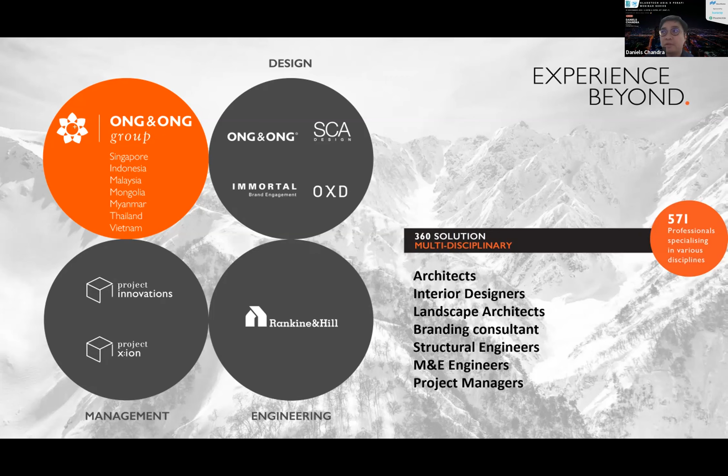I would like to touch base a little bit on the approach, which is building information modeling. I hope most of you are familiar with BIM before. In the Singapore context, for example, we started back in 2010 with BIM. The Singapore government basically pushed consultants to embrace BIM in their design and also for authority submissions and building approvals.

So BIM essentially is basically we model the thing first virtually, and we produce the drawings that come from the model. It's not the other way around where you create plan, floor sections, elevations, and then get the models after that. You actually start with the model first, and drawings come later.

So the use case of BIM is pretty much across the board from start to finish of the project, starting from design development, conceptual design, including authority submission for the Singapore context, 3D coordinations, and all the way until FM and some automations. This is what we have for BIM.

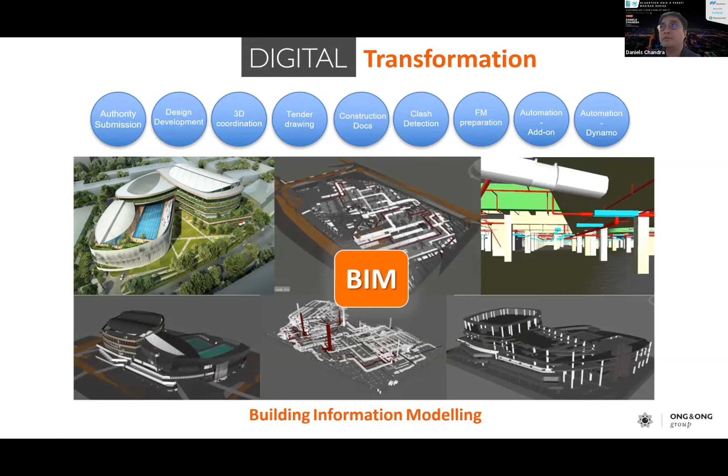Now, Singapore also embraced what we call virtual design and construction, VDC. That was back in 2015, which is basically another enhanced process after BIM. So we have BIM, we have ICE, integrated concurrent engineering, where everybody gets together to do coordination using the BIM model, and then processes of production and management, things such as DFMA, design for manufacturing and assembly.

So all of these are part and parcel to create a virtual mock-up of the actual thing before it's actually built. So what we call is, we build it twice. Conceptually, we build it in the computer first, then after that, you build it on site.

Just to give you an idea, this is one of our projects using the VDC process, where we built the whole entire thing virtually from design all the way to the construction process, meaning site logistics, how these things are actually constructed, from the building structure, architecture, M&E, as well as the facade.

So step one is to build the thing virtually using BIM technology. Second is to build the thing on site. So make sure everything has no issues, no clashes, no problems, then you actually construct it on site. That's the holistic approach of VDC, which is pretty much the approach of digital twin, where you have the physical and the virtual together.

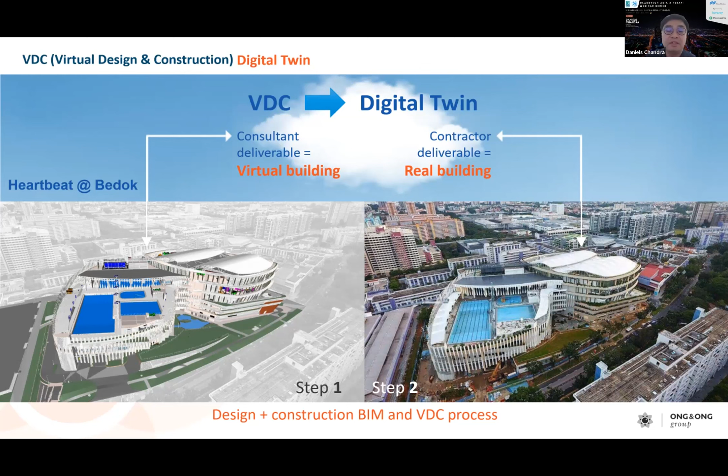Now, IDD, this is one of the latest approaches of digitalization from BCA Singapore. The earlier approach started back in 2017. IDD stands for integrated digital delivery. There are 4 pillars: first is digital design, second is digital fabrication, digital construction, and also digital asset delivery and management, which is pretty much FM, or facility management.

For the purpose of today's discussion, IDD is quite a lot to discuss if you go through everything. So for today, especially relating to the facade models, processes and workflows to create the facade design, it's pretty much digital design, which is on the left-hand side here. It's about how we optimize the design for the facade, how to do simulations and analysis on the building itself, and how to integrate the whole process together with BIM and VDC.

I'm going to touch base also about the cloud, because especially nowadays with the needs of collaboration, how we actually move from traditional method to the digital method. Cloud-based is very essential, especially with the implementation of common data environment.

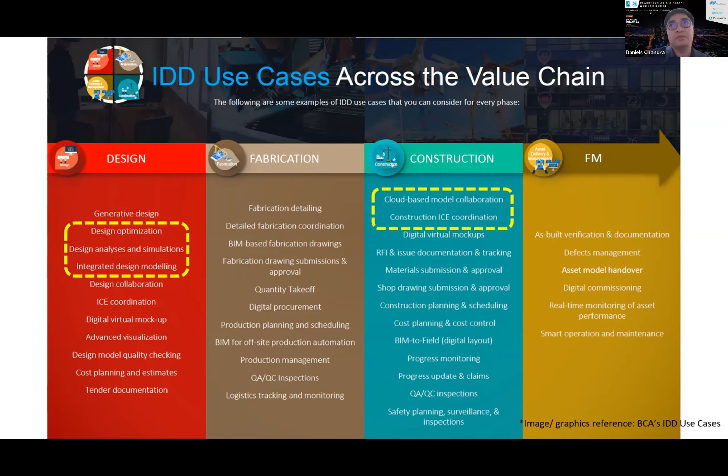So in our context, for the digital transformation pillar, we came up with a strategy we call Digital Beyond. It's basically a three-pronged approach: first is the digital workplace, second is the digital workforce, and last is the digital workflow.

We set up our digital workplace as a base to enable the other two. Our staff and manpower need to be trained and need to change their mindset to embrace the holistic nature of digital transformation. And after that, the workflow itself needs to embrace the whole three-prong approach and be delivered in a digital way rather than the manual way.

Okay, so I'm going to start with the digital workplace, which is the difference between standalone and collaborative. We're moving away from standalone to collaborative. When we started BIM in 2010, 2011, and 2012, back then it was kind of standalone - we were doing our own architecture models, consultants doing their own structure models, and our M&E design partners also doing it on their own. But we need to move into something more collaborative now with the whole effort of IDDs and VDCs and so on. Collaborative is the way to go.

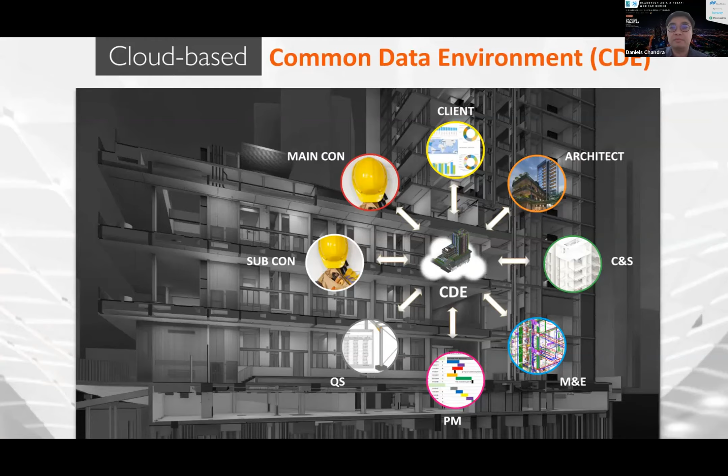This is an example of a project we did using the common data environment, which successfully won an award. This is one of the healthcare projects, and another one is a private residential project, one of the first 12 IDD projects in Singapore.

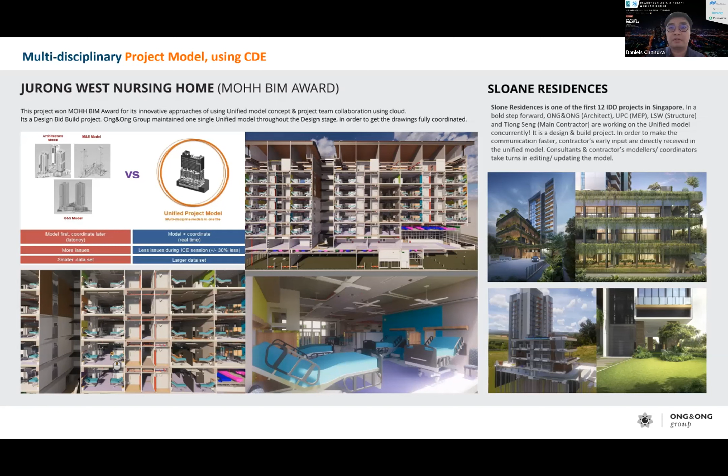Speaking on the workflow, the reason CDE is important is because it's the platform itself. In terms of creating the BIM model, conducting VDC, and integrating it into the IDD workflow, that becomes one of the enablers. For example, we can enable a multidisciplinary BIM model.

So every discipline, every consultant actually works in the same file, the same model. Essentially it's one single file. So with real-time authoring, we need this kind of infrastructure to be enabled first.

Digital design with computational BIM is something I'm going to talk more about after this, related to facade treatments of the building and how to generate facade options from this tool. This is one of our add-on tools that we developed in-house for BIMomatic, another way to automate the process to ensure the IDD process of automation is implemented more efficiently.

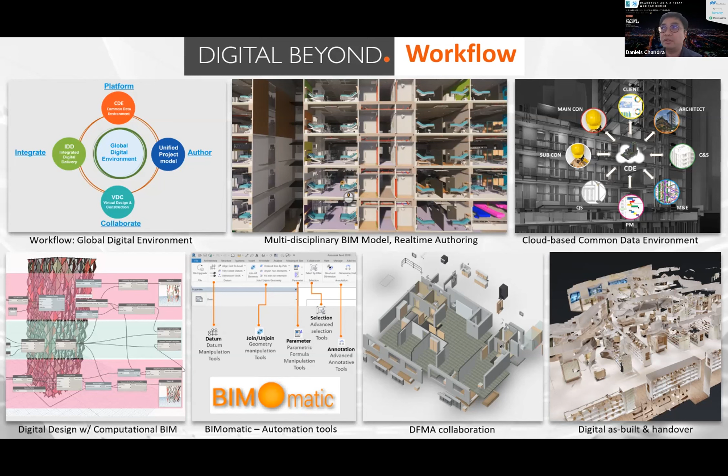DFMA is the next level of digital fabrication in IDD, so it's one of the key things we're deploying in the office, as well as for the FM handover. When the project is finished, we scan the buildings using a LiDAR scanner, then hand over the model together with all the sets of FM data.

How much time do I have? Okay, so the generative design, digital design use cases for IDD, I'm going to touch on this—pretty much about parametric modeling, computational BIM, and generative design.

Just imagine we have this kind of square cube. Parametric modeling, computational BIM, and generative design is one of the methods we normally use to do facade treatment for the building, which is part of the IDD use case listed in BCA's IDD.

Imagine a box like this. What it does is we manipulate the box with different heights, different lengths, different configurations of width and height, and so on, then arrange them accordingly with certain patterns. So this is how we manipulate the models and create options for the facade, for the building skin.

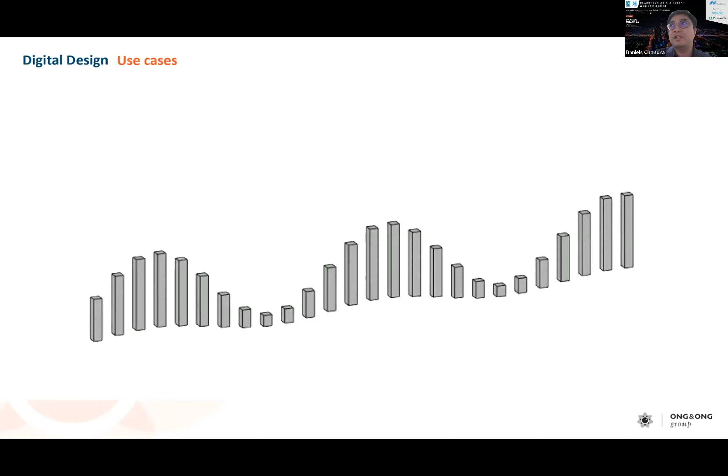Once we manipulate it with a script like this, the computer can offer us a series of options. These are examples of options being offered—there are so many pages of options displayed by the computer. As designers or architects, this tool is quite helpful.

Essentially, these are the ideas of how parametric modeling, generative design, and computational BIM actually work. Now I'm going to show you some case studies from the project itself.

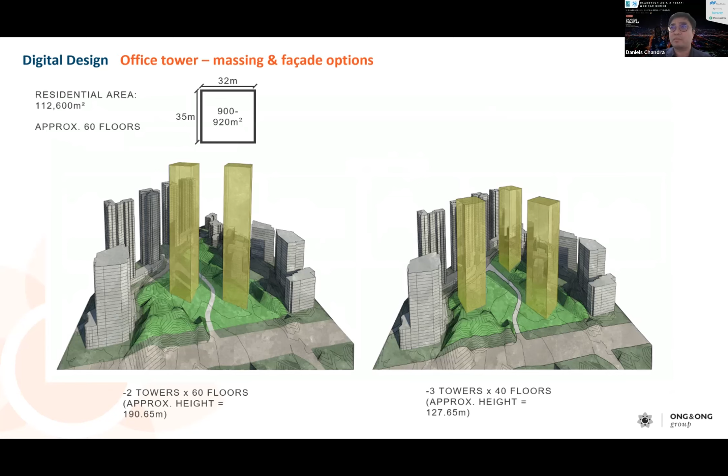This is an example of a master planning project with two towers, I think it's residential. It's a typical so-called building massing. We have typical towers like this, with the setup including ventilation gaps, balconies, and terraces, and so on.

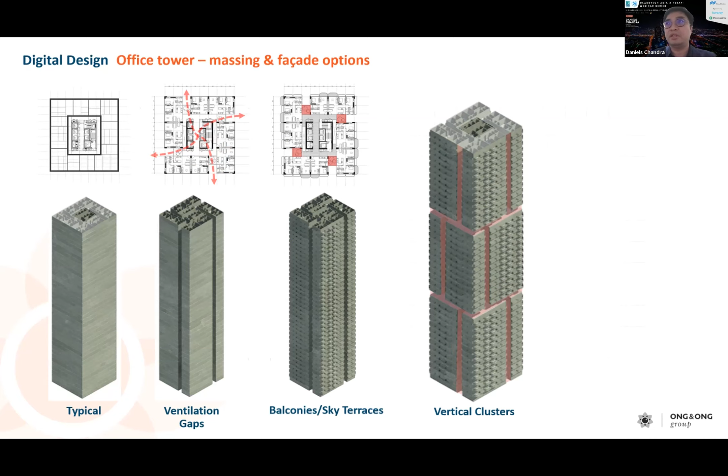After that, we play around with vertical clusters. These vertical clusters allow us to set different permutations of the massing itself using the script. This is an example of how it works. We're using Dynamo for this, and the model is done in BIM using Revit software.

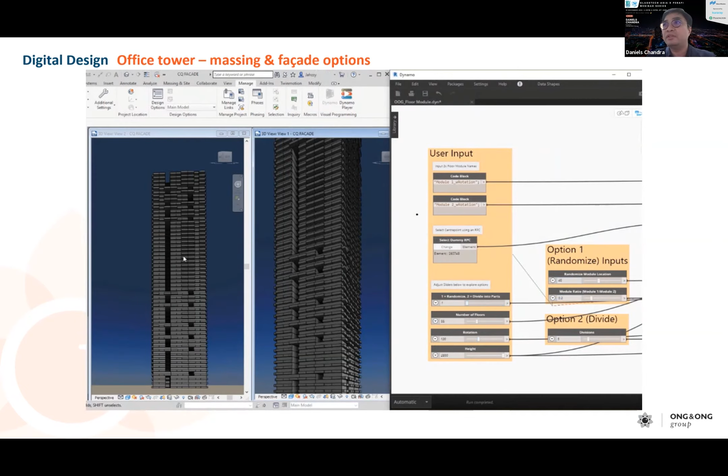We have these kinds of sliders to change the modules of the facade, and a few sliders to randomize the pattern. This creates different treatments of the facade itself—that's how it works in terms of getting different kinds of feels for the elevations of the buildings using the script.

Another example uses generative design, where the computer gives you different sets of design options, and you can choose which one is actually suitable for your case.

And there's another set of scripts using Dynamo, to set the site dimensions, plot ratios, and so on, and then some facade divisions and rotation angles and stuff. This is an example with the paneling options, with twist the massing, using a different size of paneling system, and then this one is a square one, and the other one is like a diamond shape.

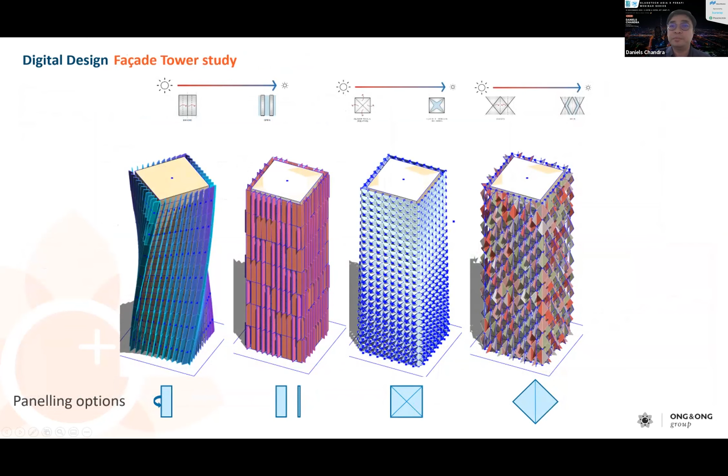And this is some of the output of the design, with the model twistings and foldings and flowers and staggering, right? So with two different sets of scripts.

Okay, so again, we're using script to do this. Basically, it's input to get the materials, to get the sizings and so on, and then we process it and after, create the output into the model.

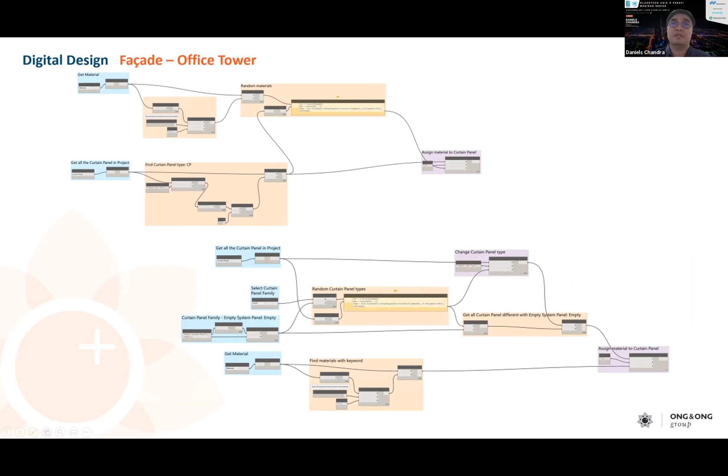This one is for analysis. Basically the facade treatment, how the panels actually correspond to the sun, for example the sun angles and so on, right? So to give you a bit more detail on the idea is, how these vertical panelings actually respond to the

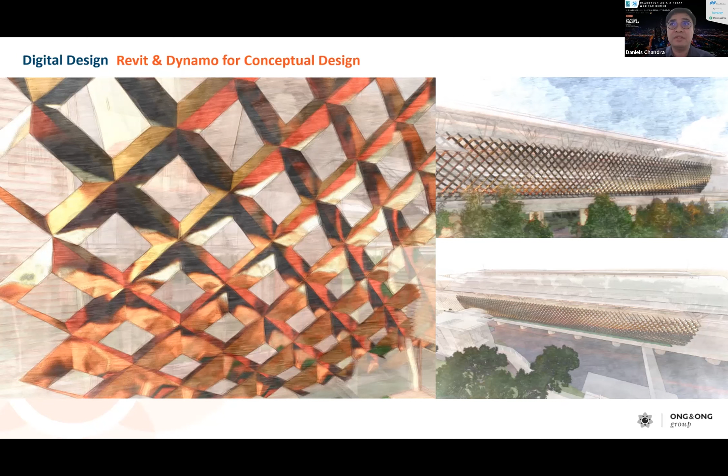sun orientations. Now, another example is dynamic architecture panels. So how these things actually create more kind of dynamic shapes, different sets of opening, right? So it starts with a simple rectangular with the openings in the middle.

And then after that, we join them together using parametric design to actually array them together, right? And then with the sliders, you can actually adjust the openings and the closings of the actual panel.

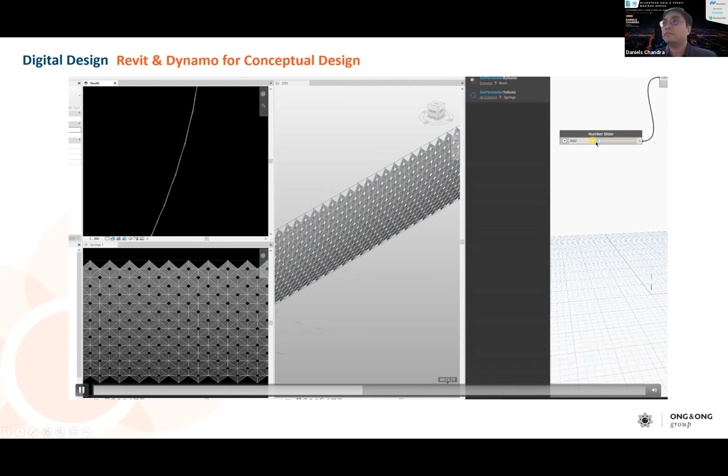Okay, so maybe next. Okay, so now with this, we can also create a different set of, I guess, more dynamic kind of gradients kind of opening rather than just a flat one.

So all of these are actually done by the scriptings, and actually the visual programming like Dynamo, for example, is really helpful for us to generate all of this.

And then we can actually adjust the sine diagrams, the sine graph here, to correspond with the openings as well. Okay. So, and yes, this is the final outcome of the facade itself, to have that kind of dynamic opening and closing.

Right. So I've shown you all those examples. So basically, in our context, we actually author all of these using a cloud-based environment.

So authoring from design, modeling, analysis, and simulation all done in the cloud, as well as doing the coordinations with other consultants, right? So we use 100% cloud-based in there.

So what is the difference now? This is the traditional way of a non-CDE workflow, right? So we model the facade. Normally we have to export because you may use different software.

You may use different applications to export to another format, and then you get it uploaded somewhere because you need to send it to another consultant. Say, for example, facade consultant wants to send it to the architect's consultant.

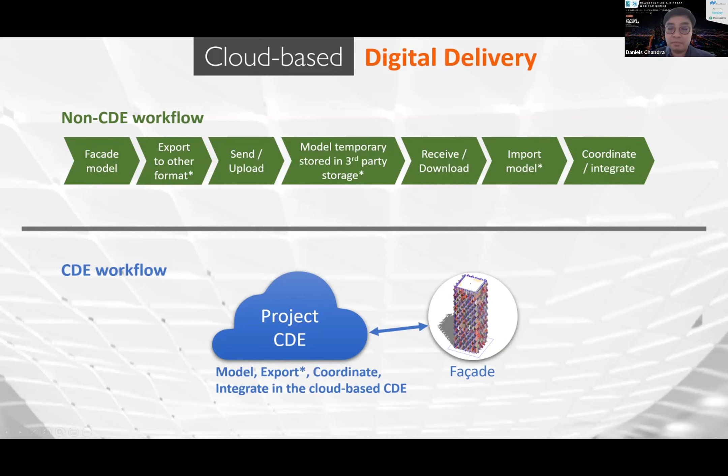So in the sense, the facade consultant is just doing it here as well, architects doing it here, and then as well as M&E and structure. So all the models actually sit in the same common data environment, which is in the cloud. What's the difference?

The difference between sending and upload is that with a non-CDE workflow, we have disconnection. We hand over the model rather than sharing it, so we're working in silos. I think that's the most challenging thing.

With cloud-based, we maintain everything in a single source. We invite them to collaborate, so we don't hand over the model. We actually get the team to join the cloud space, the virtual space. All stakeholders and the project team start from the beginning, so everybody gets the correct setup from the start. What we do is basically share the files with that person, and then they can jump in and work on the models there.

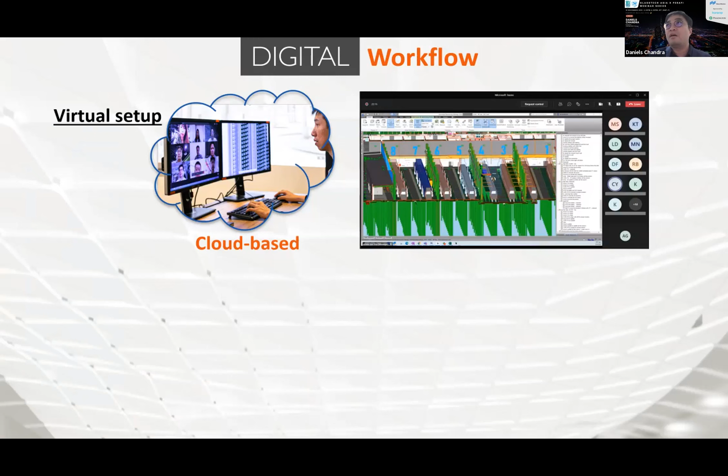So digital workflow, we're going to see more of this happening in the next few years, or even now. Many companies are already embracing this. Virtual setups, I think, is the way to go. We always use Zoom or MS Teams, for example, to do conferencing and so on. So integrated model is the key.

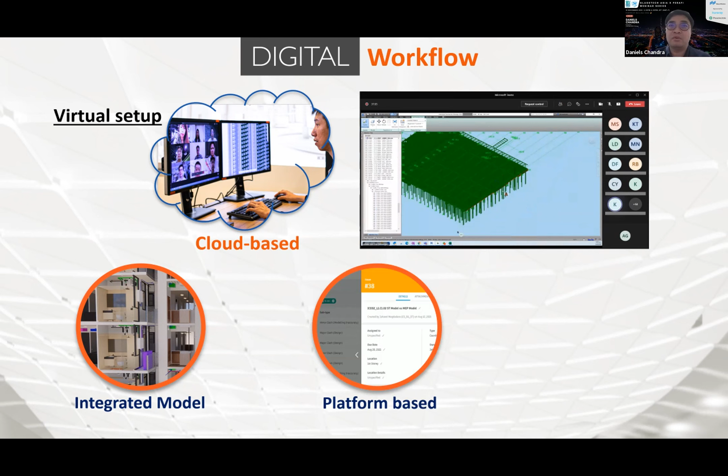We no longer—individual models become an issue now. If you only have your own model, not integrated in one space, it can actually cause issues in coordination. So more people are embracing platform-based setups now for the CDE, to set up their infrastructure, and also use automation tools. Automation can be using simple scripts with Dynamo, for visual programming, or maybe other tools you may have. So integrated model—of course your BIM now becomes more multidisciplinary BIM rather than a single standalone BIM.

It helps on the VDC if you have a platform, and with the automation tools like visual programming, these things help on your automations for the digital delivery. So for Ong and Ong, just a quick recap: we embrace workplace, workforce, and workflow as one holistic digital-centric initiative, basically to prepare us to become a future-ready practice. So we embrace the cloud and working anywhere with mobility and so on.

Just to give you some summary in video form—if you don't mind, I'll play this one for you, a quick one.

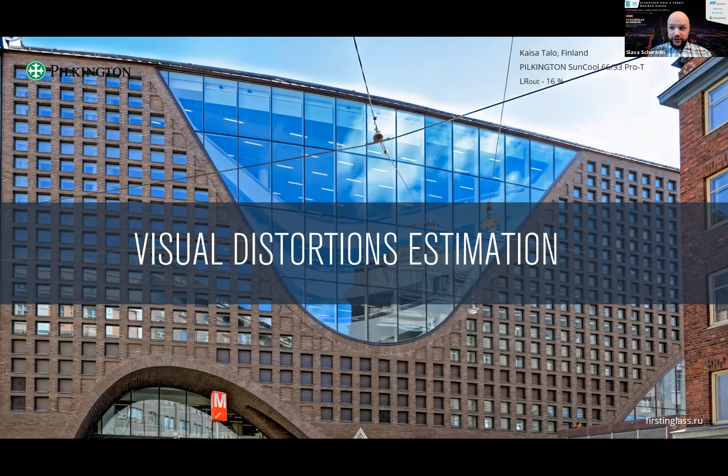The glass is perfectly flat. But when it comes to reality, and the building is ready-made and done, there are a lot of distortions which you can see in many cases. Of course, most of them are because of physics. Physics cannot be avoided, we're living in the physical world. Today we will be talking about how to estimate the correct IG unit composition to minimize these distortions.

First of all, usually for any big building, the calculation of IG unit is made in terms of its performance, and because of its behavior on the facade. The static calculation usually gives you two results. First one is maximum stress on the glass, which means if the glass will be broken under the loads or not - so under the wind, under the temperature. And the second thing is glass bending.

So those two parameters you get from usual calculations. But the very important thing is how to correctly see and interpret the results of the calculation.

Usually, we take into account several load factors. Wind load, of course, because if you're building a tall building, the wind will be very high. Second, and very important, are the climate loads, because the IG unit inside has some air or argon gas, and it is hermetically sealed on the perimeter. So when the IG unit is installed, when it gets heated up, the gas expands and the glass bends, creating distortions on the facade, which many don't like.

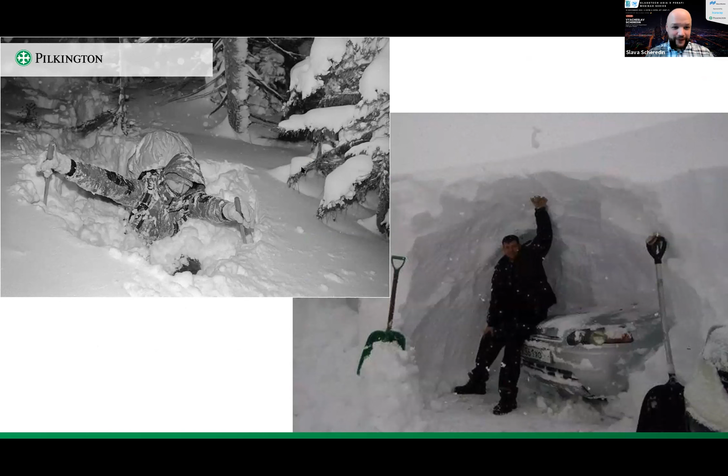Fortunately, snow load is a case for Russia, but not Southeast Asia, except for the mountains here. So some examples of our weather are included on the slide. Okay, jokes aside.

Usually, glass is calculated under extreme load conditions, meaning wind which can happen once per 50 years, so twice a century. This is very important because the most important function of the facade is to withstand maximum load combination and not break. Nobody likes when facade pieces are falling apart on people's heads.

But if we want to bring it closer to reality, meaning what we see every day, nobody will look at the facade when it's a hurricane raging. And the thing is, if we look at the bending of the outer glass - because the outermost glass gives us the impression of the facade - when we compare maximum loads and usual loads, the results are extremely different.

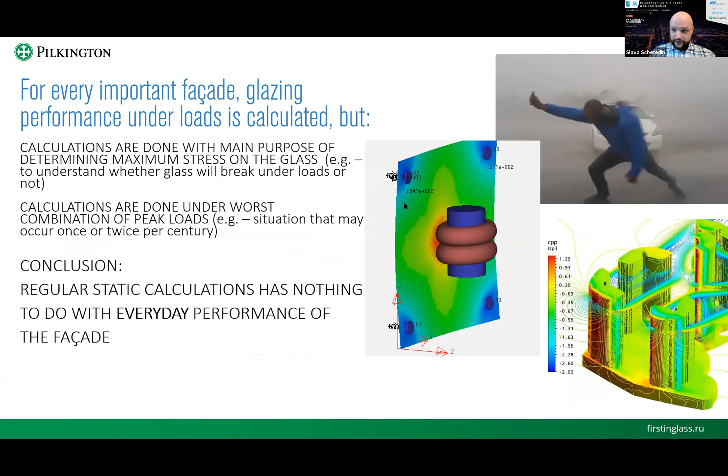To get back one slide, the most important thing in every peak load calculation is glass stress, meaning we are estimating glass breakage. And the glass breakage and the conditions under which it happens are not valid for our estimation.

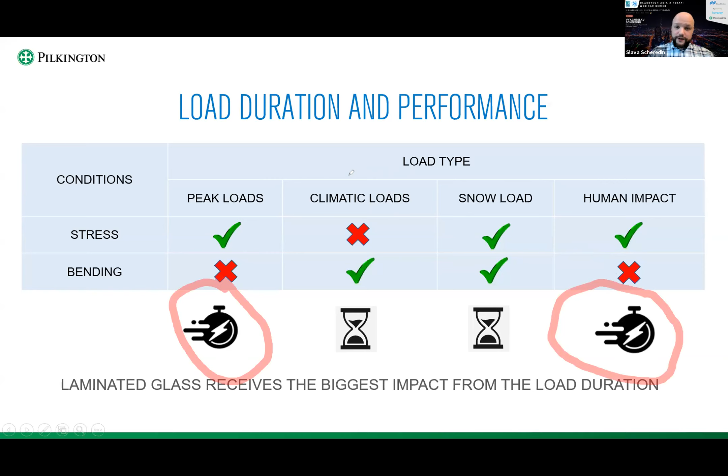In order to understand what we do, let's see which kind of loads can be applied. Peak loads, so maximum wind, usually has very short duration. Special loads like human impact also have very short duration. So in normal life, we don't expect very big wind bursts. And here comes the climatic part and snow part, but snow part again for those countries that are very snowy.

Out of that, we can gather that climatic loads are the most important thing for us. Under these loads, the visual performance of the facade should be estimated. So these loads are long time, and we are good with that.

So should climatic loads here throw away the wind? In fact, no, because the wind, not the strong wind, is regularly present, but we should take the wind which is happening every day, under everyday conditions. And there we can go to the calculation process.

The climate loads are most important, as we understand before. So what is the climate in terms of IG unit? For IG unit, the temperature which is inside the IG unit does matter - the temperature of the gas between the glass. By the way, if you install single laminated glazing without gas, this thing is absolutely mostly unaffected by climatic loads, which is good for lamination, but very bad for energy efficiency of the building in terms of solar control and U value.

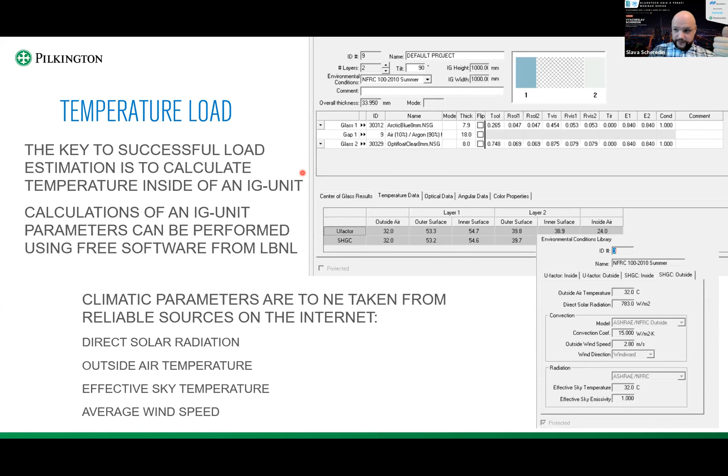Now it's time for us to estimate the rest. First one is the pressure, meaning atmospheric pressure. This is mostly happening for high-rise buildings, skyscrapers. But it's also very important to take into account if your building is located quite far away, and most importantly on a different sea level than your production. So building location and production location difference does matter.

In some cases, if you are producing your IG units at sea level and then transporting them high up into the mountains, you can install special valves to dump the pressure out. But these are nuances that can also be considered in the calculation.

So temperature, pressure, and height difference, plus the wind. For wind, we can use normal climatic data from the internet, from websites dealing with weather, to see average wind conditions. Usually the conditions are presented as wind speed, but wind speed can quickly be transformed to pressure using a simple equation. Mind you, we're not taking peak wind speed, maximum - we are taking regular wind speed which is happening every day. Our goal, again, is to calculate the everyday situation.

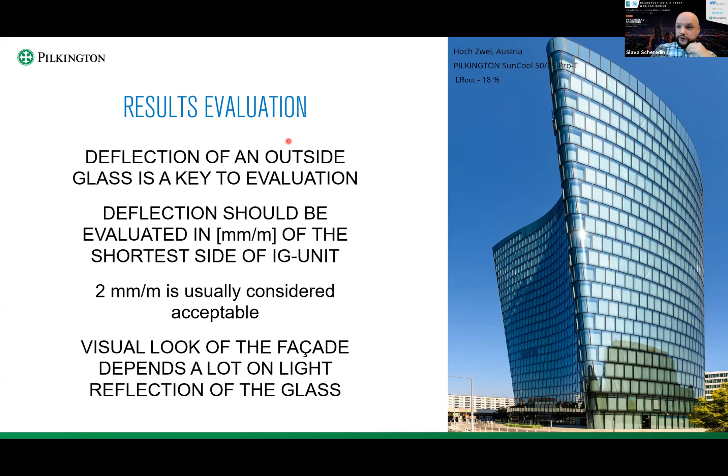Here in Russia, we've been performing these calculations for a long time already, and usually we provide the customer with both of them - so he can see first, will the IG unit hold, and second, how to compare different IG unit combinations. This is key for understanding the behavior of the facade. Of course, it can also be visualized - the previous speaker had a very good presentation about BIM possibilities. It can all be visualized with BIM and visually estimated in advance.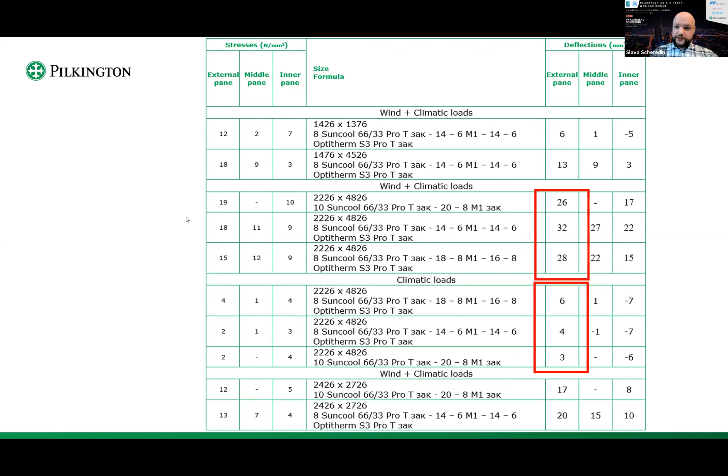Some nuances to this, because different IG units react differently to loads. Here you see the facade is made of exactly the same IG units, the same size. But here we have a transparent zone, and in between a non-transparent zone. Again, the combination and size of the IG unit are the same, but visually the non-transparent part looks much worse.

That's simply because the IG unit for a non-transparent part usually has standard glass outside and painted glass on the inside. That means in the summer it will heat up a lot, and in the winter it will be much colder.

So back to the point - different facade parts should be evaluated separately, and the IG units for different building parts should be designed separately. So the composition could be different for a non-transparent part of the building, even if the size is the same.

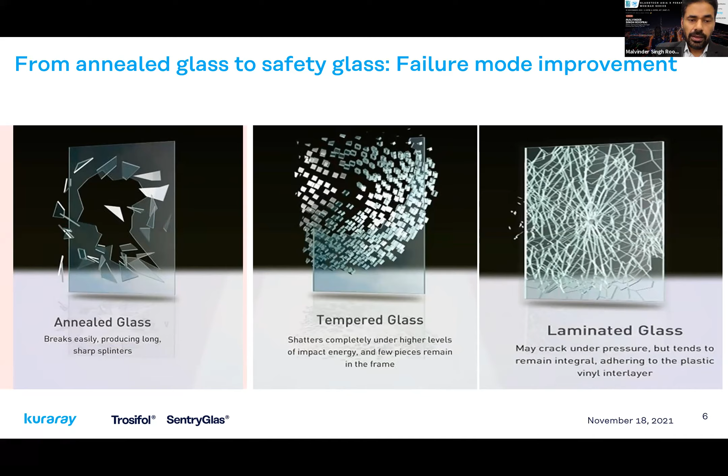So here's a more clear comparison of safety glazing versus security glazing. It's important to remember that when the intent is just to protect people from injuries from the glass, you need safety glass. But when you're trying to get more from the glass and want to prevent people from breaking in, forcefully entering the building, then you definitely need security glass.

The intent here is to increase the break-in effort or the time needed by a person forcefully entering the building. Security glazings should not be confused as a standalone solution, because we are trying to gain more time so that secondary alarm systems get activated. Eventually, security glazings are made of man-made materials, and every man-made material can be destroyed. So that's why we make it very clear that this should not be confused as a standalone solution.

The next important point I need to highlight is never ever consider tempered glass for security applications, because the breakage pattern, as we've seen in the previous slide, is very poor for security glazings, and you will have a wet blanket effect if you use that.

Lastly, the design of a security glass is influenced by the anticipated threat level. So you or your client must have a very clear idea about the anticipated threat levels. What is threat level, we will talk about in the coming slides, and whether SPAL is acceptable or not. SPAL is the risk of injuries to people sitting next to the glazings. This is relevant for bullet resistant glazing applications, and we will touch on that topic in detail in the coming slides.

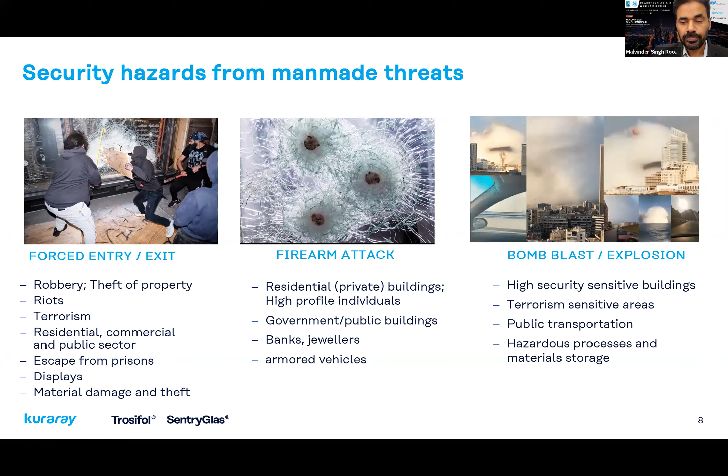So when we have to mitigate the threat from these kinds of attacks, you need security glazings, and these have to be designed properly with the right anticipated threat levels. When we talk about anticipated threat levels, it's important to standardize the things. The most commonly used standard for checking the performance of glazings for intrusion is EN 356 standard, very common in Europe, and something similar is now happening in India also, in my country.

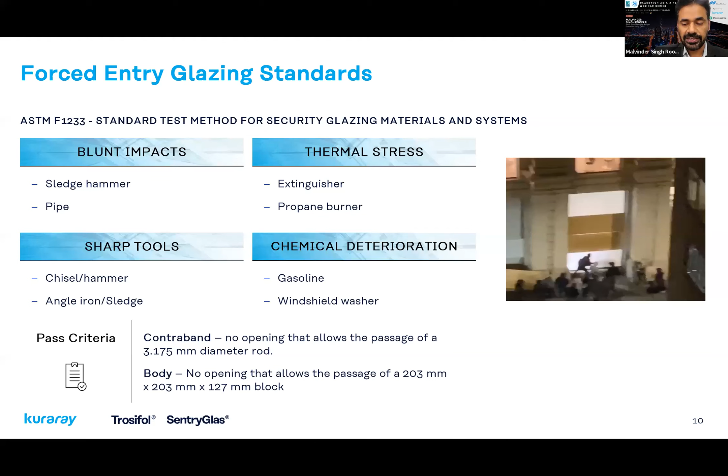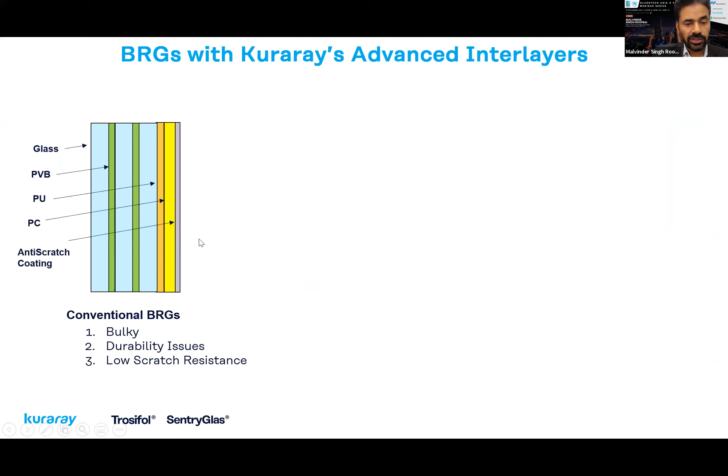So here I have an illustration of the comparison between conventional BRGs, or bullet resistant glazings, made with conventional materials. They are quite bulky, they have durability issues, and they have very low scratch resistance. For that reason, they need to be replaced quite often. Although they have an anti-scratch coating, it's not good enough for the lifetime of the building.

This is an excellent product from our portfolio, used for anti-spall solutions, which I mentioned before. Rather than explaining, I'll play an interesting video, and you will understand very quickly what Spall Shield is.

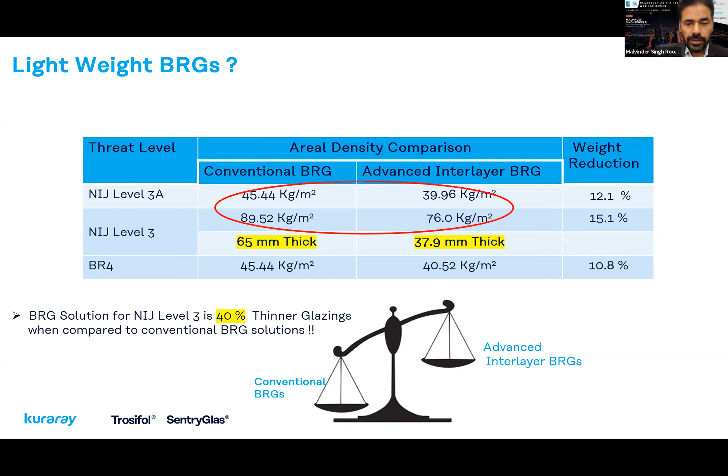The Spall Shield CPET has absolutely no effect, and its optical quality remains up to the mark even after exposure to these chemicals. It's a clear winner against other conventional materials like polycarbonate or acrylic.

If I just go back and show you that - I forgot to mention these are the commonly followed pressure levels for important buildings. 10 psi is generally a very good pressure level that is considered for all the federal buildings in the US, recommended by the Department of State for important buildings.

But for even more important buildings, maybe like, I'm just guessing, the White House, it might have been designed for a pressure of 40 psi or even higher. So in those kind of situations, our products can help you meet the desired performance levels. And the spall shield can also be used to make it even more safe if you want to prevent the risk of injuries from glass splinters, as we have seen before.

And this is my last slide. I'm just going to summarize the advantages of the security glazings which are made with advanced interlayers from Kuraray. So they have got the highest optical performance, as we have seen with SentryGlas, which is the

most clear interlayer available in the market. And then we have spall shield, which also has optical clarity next to the glass. After years of exposure to UV radiation, these materials have the capability to retain their high optical performance. And then when we talk about high resistance against weathering, nature can be very, very cruel to any material.

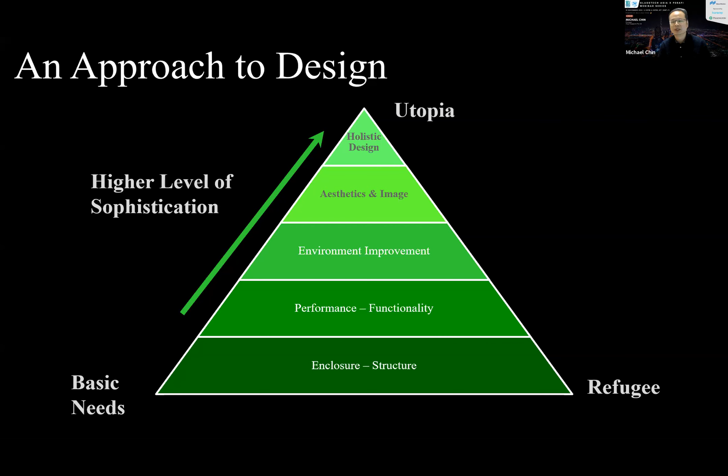At the top, we call it utopia, but very often how to achieve that is an issue. And in today's context, that's where digitalization or digital tools have become an enabler, especially for us engineers.

So this is just one of the workflows that we use. All the different software, the different logos, from doing structural analysis to looking at geometry, facade optimization, thermal performance, and on the right hand side you've got documentation - Revit, AutoCAD, something we're familiar with, and now we're even talking about visualization and virtual reality.

So without tools, without software, without digital, that's hard to establish, although the thinking has been there for quite a while. Today I'll talk about 3 topics we've been working on at Arup. First is facade canvas. Second is how we solve complex design issues, mainly geometry and modulation studies. And the last one is digital inspections.

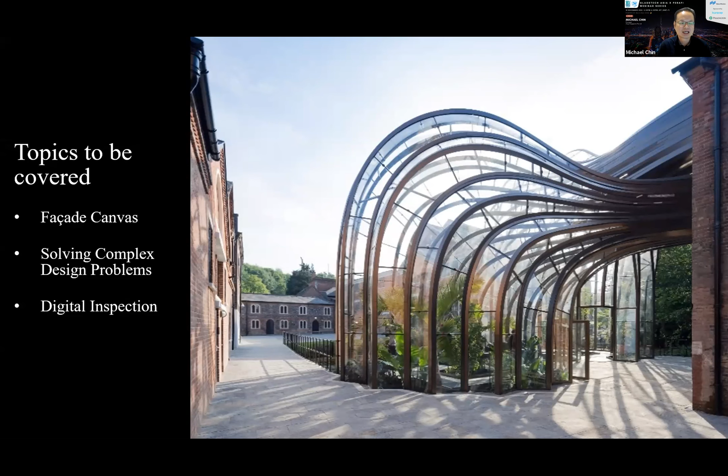So facade canvas is an in-house tool that we developed. It's essentially our definition of parametric design exploration. We do exploration from time to time, what we call optioneering, day in day out, and we want to find the quickest way to do it, as efficient as possible, because this is essentially a circular process that goes round and round until you get a solution that you want.

In the olden days we looked at things in 2D - architects had their drawings, elevations, GAs. When it came to different consultants, structural engineers had one set of drawings, the facade engineer - at the time we didn't even have facade engineers - would have his own set of drawings. All of that becomes hard to really understand and capture, especially when you want to do design.

So now with software we're looking at a single source of truth - one model. Daniel talked about BIM and it's so common now. But for us facade engineers, it's even more important that we do options again and again.

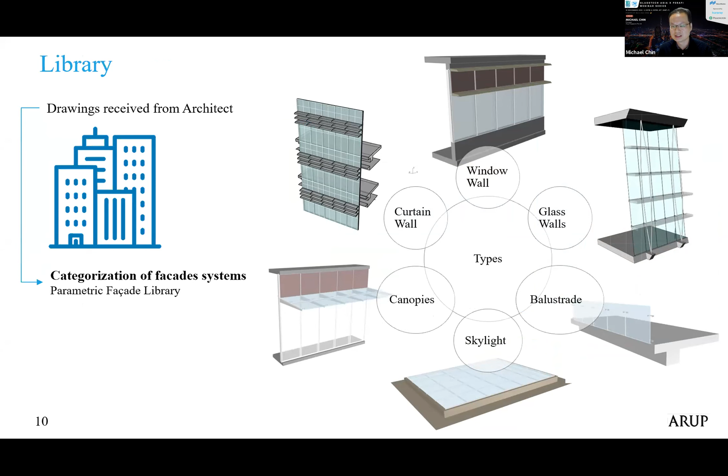We're developing libraries within Arup to categorize the different facade systems, and these systems will be quite familiar to you. Very often, for example with curtain wall, one system, we look at different options - you move the spandrel up in one option, the others you increase the vision panels, move the sunshades up and down.

When we were doing AutoCAD, that was a quite difficult process. Although we could imagine it, we didn't really know how to convey that. So essentially, using the software - built into a series of Rhino and Grasshopper scripts - we can quite easily get all of these things done very quickly.

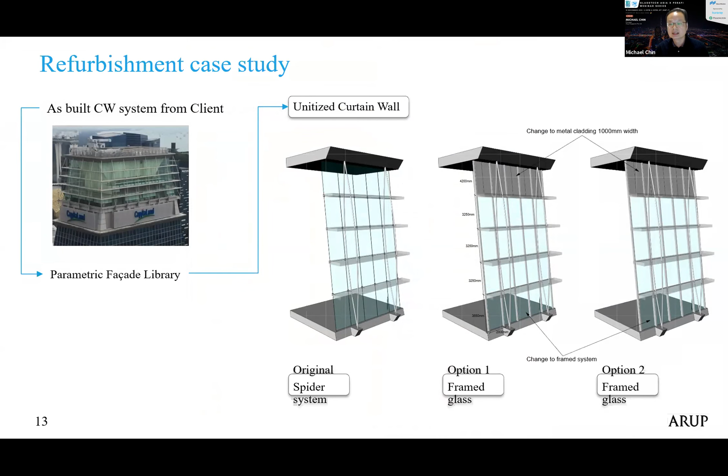Any options you want to change within the parameters of this design, you can - all with just a few clicks, and we get the different options. Similarly, in the case of refurbishment, we can do the same thing, easily looking at parametric design in a very quick and easy manner. All of that is done in a tool that we can eventually add more and more scripts to, to make our design process a lot easier.

Okay, let's talk about geometry a little bit. This is also something we do quite a bit, and you'll be familiar with this structure - Jewel. We look at it this way: the end product is pretty complicated, so how do you actually get to that? I'd say without any 3D tools and software, and the methodology we use to get to whatever it is now, you'd never be able to get something built in that shape or form.

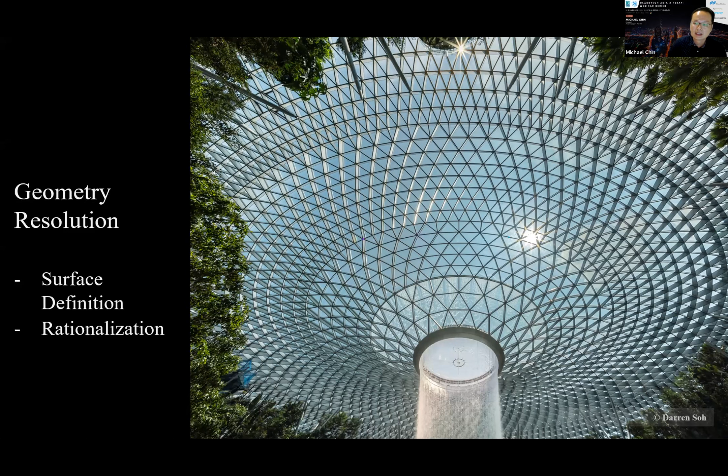And essentially it starts with this - of course the architect has his renders, and the competition is won.

The architects and its early consultants, in the design stage, will essentially work out some of these inputs, and it goes around a few parameters. So this is something on plan, something on elevation, but essentially there are a few points that the design concept has given us. You've got a point at first story, points at the ring beam on the 5th floor, and then a point on the roof. And at the end, you've got the point at the end of the curve.

That's where, after this, the water flow will start to come down. How do we actually take all of these parameters and build them into a shape that can be buildable? It's not, if you look at it, a series of arc curves with a certain radius that comes to a certain point - it's actually a spline curve.

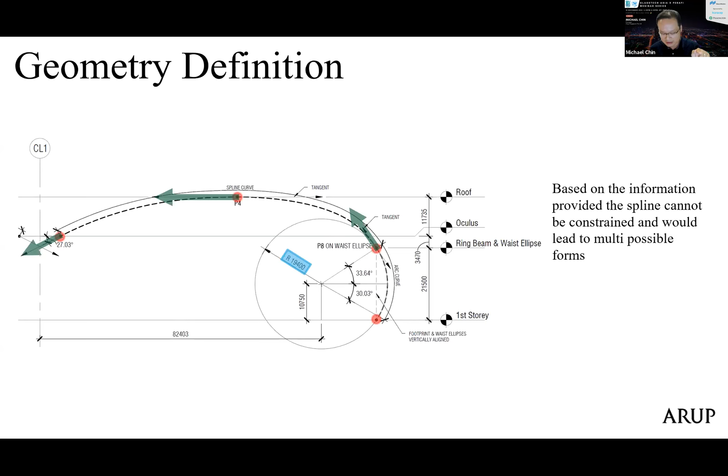When you say spline, it means it's essentially connecting the points, two or three points together, the best curve you can, not confined to a specific radius. Using scripting in Rhino and Grasshopper, we had to look at the existing geometry. There's a model that was provided, and essentially we look at the gradient at every point.

When you smoothen it, what we come up with, to build it into a structure, you need all the different elements. You can imagine all of these are segmented glass, and every one of those pieces needs to be quite smooth, and that's the reason why you can't conform to a specific geometry. It all depends on building requirements to form the shape that you want.

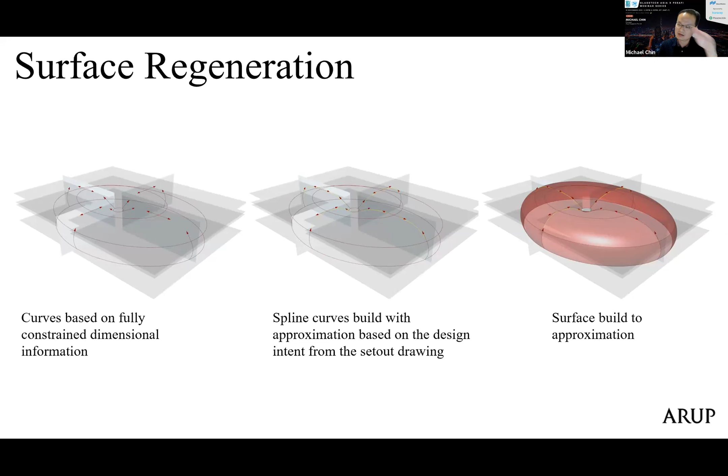So going through this process, you essentially build the curve, the curvature on that model - what we call surface regeneration - so that you get almost a smooth surface around the entire structure. Once that's done, the modulation or geometry is done, then you start looking at different options.

All of this may look alike, but they are slightly different. That's where you look at what we call horizontals and the number of panels, which led to the maximum glass size. Every one of them has slightly different modulation, leading to different sizes and different quantities for different things.

So without software, without digital tools, there's no way we could actually get all of these things out. Of course you can do it by hand, but that would be painstaking.

So this is another project we do - I think it's quite familiar to some of you. It's a drone view, and essentially when you look at it, it's 4 towers all connected by this so-called sun shading element that goes around. The design intent was just a series of curves like that, different on every level.

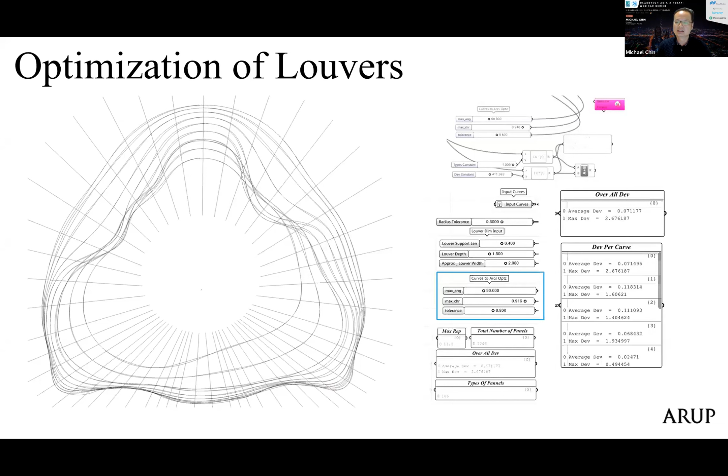Frankly, it's a series of spline curves, and it doesn't make a lot of sense if you start looking at it, because every piece - if you look at the one on the left - every piece is one different color, and one different color means one different size. Every floor is 2,300 panels, thereabouts.

You can imagine if a contractor is going to build that, it's going to run into big problems, and of course big costs. Every piece is different.

So you run through it with a series of scripting - again it goes to the left, the right option. You kind of relax it, what we call dynamic relaxation, and put it within certain boundaries using a script. Essentially you can then smoothen the curve a little bit and bring your panels down to smaller and more regular repetitions. Frankly, you can't tell the difference at the end of the day.

So there are things like ETTV calculations, which are very familiar to you, and BMU - BMU is always an issue. I won't talk about that today, but we've always done BMU in 2D. Maintenance is always an issue - people can't imagine where this gondola would go and how this area is going to be maintained by the BMU, and doing all of that in 3D actually makes it a lot easier.

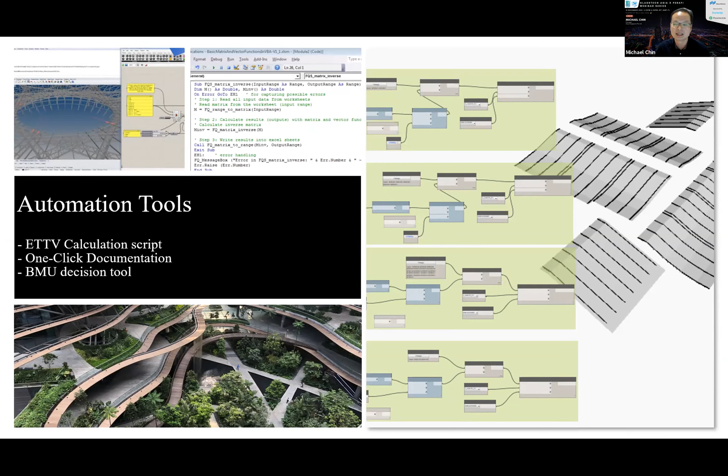Yeah, ETTV is the same thing. Agree.

It's no longer a regular shaped building where we can just use a spreadsheet and do our ETTV. Nowadays, all the buildings are curved, facing different directions, and by using a script, you can easily get the ETTV out quite quickly.

Right, which goes to my last bit on digital inspection. What are facade inspections, and typically how have we done it in the past? You imagine, how can you actually do that?

Previously, you go down with a gondola, the inspector has his 2D drawing, 2D markup drawings, and you go down every floor, you inspect, and then you try to mark it up on the elevation if there are issues. You're kind of depending on one inspector doing it all. He's the eyes and the ears, and he basically tries to do quite a few things at the same time, and of course, he's up there hanging out in the air.

And then at the end of the day, you can imagine all of this data being compiled in piles and piles. It's not easy, it's very time consuming. One building full inspection, the last time around, medium size, probably took us 6 to 9 months to actually do a full inspection. That is definitely too much time, not very efficient, and not very accurate.

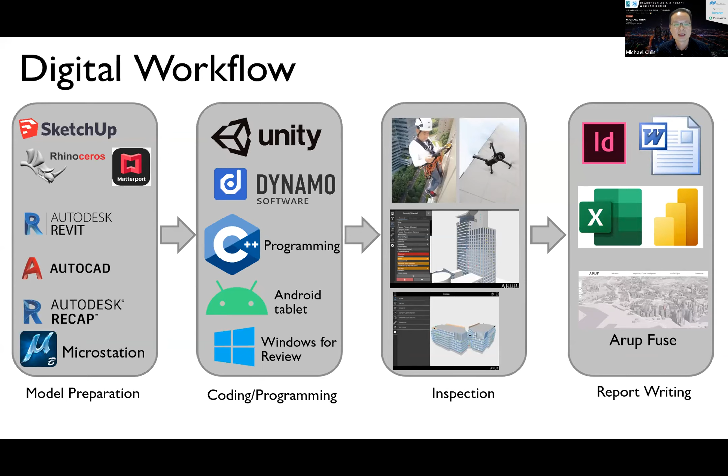So I'll start with model preparation. Of course, you've got a building, you've got as-built drawings - it's easy, and we kind of build a Revit kind of model, similar to a Revit model. We build it from scratch, and we essentially build a model pretty quickly using the as-built drawings.

But sometimes your existing buildings don't have as-built drawings, because they're quite old, and that's where some of the problem lies. We actually got to use tools like the Matterport scanner, and also some of the drone scanning devices that we have, to actually build the surfaces from ground zero, and so essentially build a model just based on the sort of scanners that we have in the market.

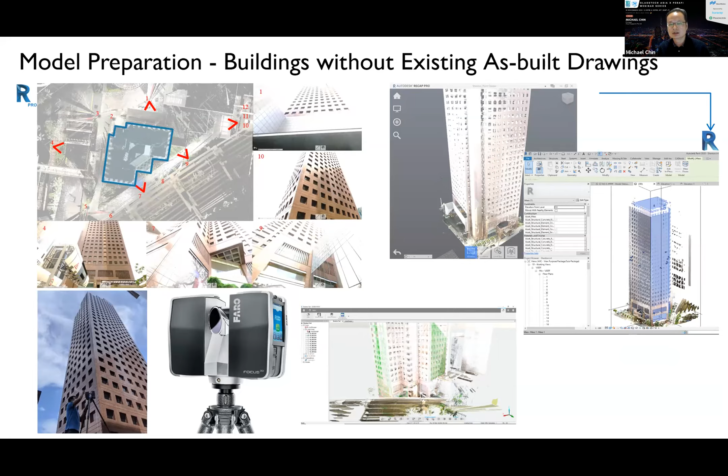And using that, this is kind of like the existing FARO scanner, the LiDAR scanner on the internal front. For clear spaces like that, you can actually get a quite good model, and it's quite accurate.

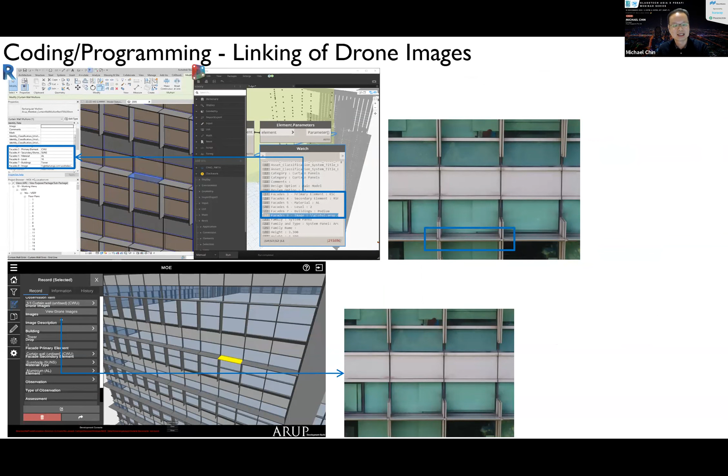Then after that, we start - that's the difficult part. Essentially, when we build a model, it's kind of like a surface model. When we have a Revit model, we actually need to link each and every one of the images or the drone images to the element or to that model, so we know exactly where the defective elements are. And the whole process is built around this.

You've got, for example, your whole drone going up and down, or your human going up and down - you collected 10,000 photographs, for example, and how to link them. Previously you would mark it up on your 2D elevations. Now you actually immediately mark it on your model itself, using either the drone images or the human essentially holding, for example, an iPad or Android device which is linked to that model. So it's a lot more accurate, and the data is stored immediately. There's no difficulty, no inefficiencies to retrieve the files later.

And also that last part I was talking about was report writing. All of this can then be generated into reports quite easily. A lot of these reports, because they're inspection reports, have quite a lot of repeats, and the format, as you can see on the right, when you're doing inspections, they're identified at the point of inspection, and then it goes straight into a report format. So there's very little we need to add on, except maybe the executive summary at the front and of course the summary at the back.

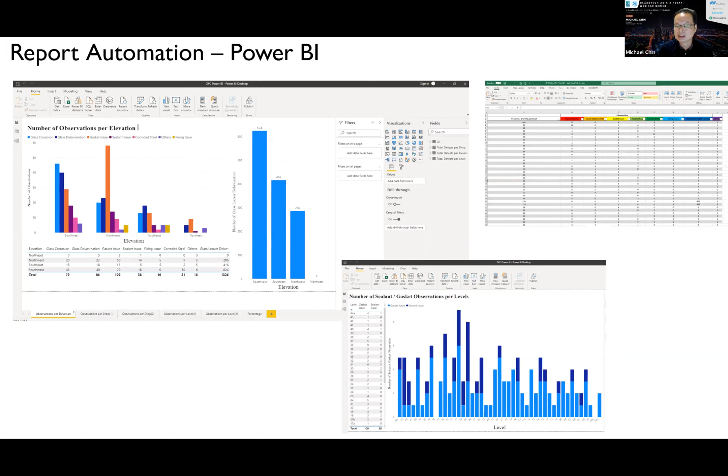That process he's attributed to the whole process of total design, thinking back in the 1970s and even earlier. Even at that time, always think of design as total design, right? Rather, every single different discipline working together to produce a product. So I think my last point is we have all the visual tools that we have, but they are all enablers, right? The main thing is don't lose sight of the design itself. It's all to help us deliver a better design at the end of the day.

Okay, I think that's the end of my presentation. Thank you very much.